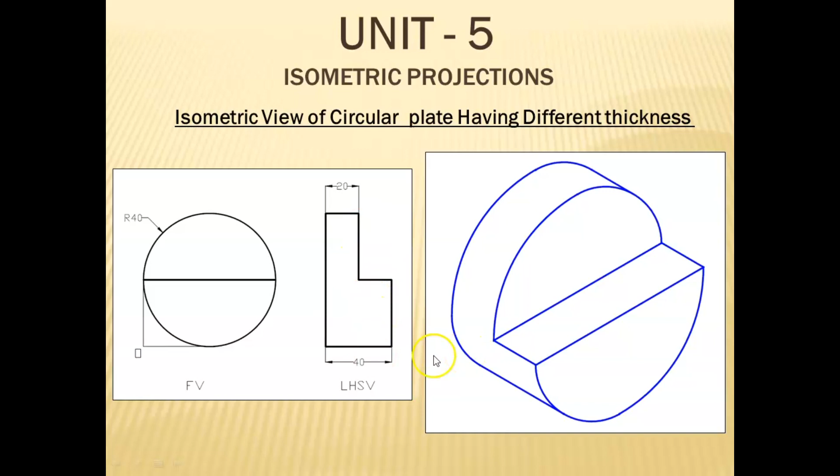Now the figure shows the front view and end view. I already explained this: end view means a side view of an object. So draw the isometric view and show overall dimensions. Now here the front view and LHSV are given to you. Normal practice is that we go with the origin in order to place the given views. But in this question, you can see no origin is given to you. Instead of that, they have mentioned which one is the front view and which one is the LHSV.

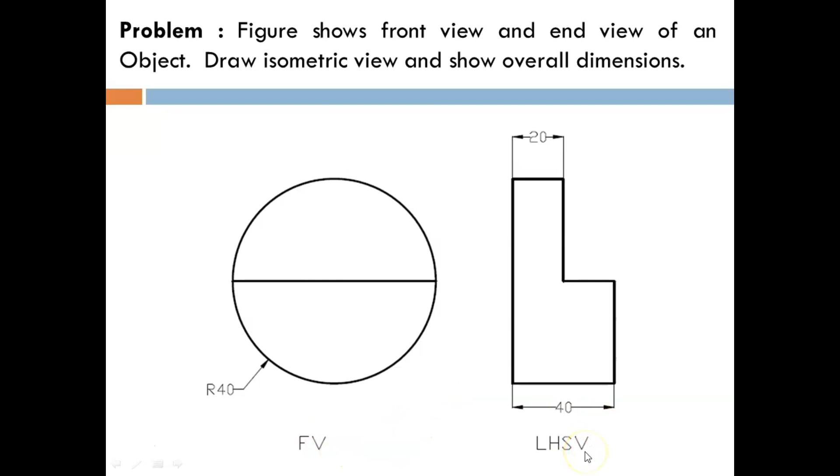So let's start with positioning the views in the isometric box. Now this is the structure of an isometric box, and this is the origin. Now considering the position of this box, in the question they have mentioned left hand side view. It means that you can see the left side of an object, or in other words, you can see the left side of the isometric box. So there are two sides you can see here.

If you consider this as a front view and the observer is exactly opposite to this plane, then this becomes the left hand side and hence it becomes LHSV. In the other condition, if this is the front view, then it becomes the right hand side, considering the position of the observer. So the given position is correct as per the given question: front view and LHSV. So here the front view is this one, the observer is exactly opposite to this, hence this plane becomes the left hand side plane of the object.

With the help of this you can conclude: if LHSV is given, then you have to draw this view on the left of the origin, and if it is RHSV, then you have to draw that side view on the right side of the isometric box. So here I have mentioned LHSV and the front view. This plane is for the left hand side view and this plane is for the front view.

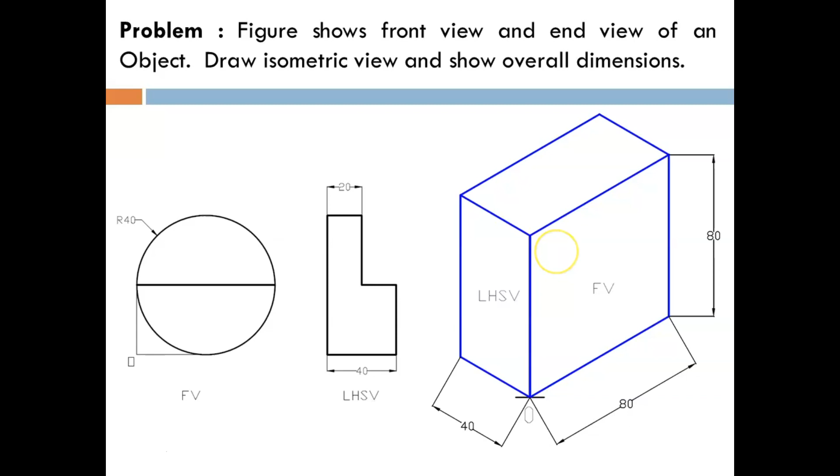Now considering the dimensions, this plane is for the LHSV, so the base is 40, as mentioned here, and this is for the front view, so the radius is given as 40, so the diameter becomes 80, so the base is 80, and of course the height becomes 80 for the front view. So this height is equal to the height of this line and this line. So the LHSV becomes 40 by 80. So three dimensions are calculated using the given two views, and with these three dimensions you can complete the required isometric box. We have already learned how to draw an isometric box in lecture number 1 of isometric projections, so kindly refer to that video.

Now in the front view you can see it is a circular object. It means here you have to draw a circular plane, and we have already learned in lecture number 2 of unit number 5, that is isometric projection, how to draw an isometric view of a circle on the required plane. Now we know that this is for the front view, so this is the plane on which you have to draw a circle.

So here first join the longest diagonal. After drawing the diagonal, this corner and this corner are not useful. Other than this there are two corners that can be used. Out of these two corners, let it be this one; from this corner draw a line in such a way that it will be connected with the midpoints of the opposite sides.

Now this is the corner, so these are two opposite sides and these are the midpoints of these sides. So from this corner you can join this midpoint. So here you will get the intersections with the longer diagonal. So now this is C1, C2, C3 and C4. So this is a 4 center method that we are applying here. That's why I have given the 4 center names.

Plot the midpoints so that it will become easy to draw an arc to complete the required circle. So here you can see the midpoints are plotted. Now using C1 and distance equal to this corner to this midpoint, draw an arc till it reaches the next midpoint. So I repeat, center as C1, from this midpoint draw an arc so that it reaches this midpoint.

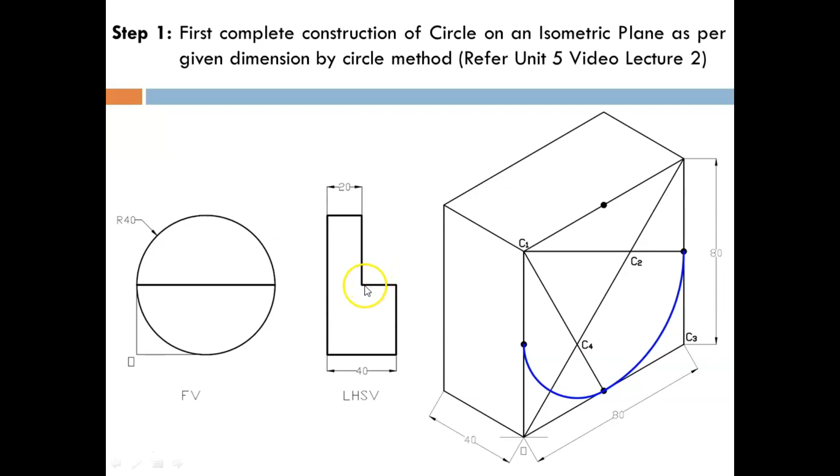Now considering this semicircle bottom side, it fits over here and that we have drawn over here. This semicircle, when you see from the left hand side, represents a line. So after that we have to move from this point 20 mm inside in a horizontal manner. But before that we have to draw a plane at 20 mm. We are considering a second plane over here at 20 mm from this. Total length is 40, so this is 20. So this is your second plane to complete the circles on it.

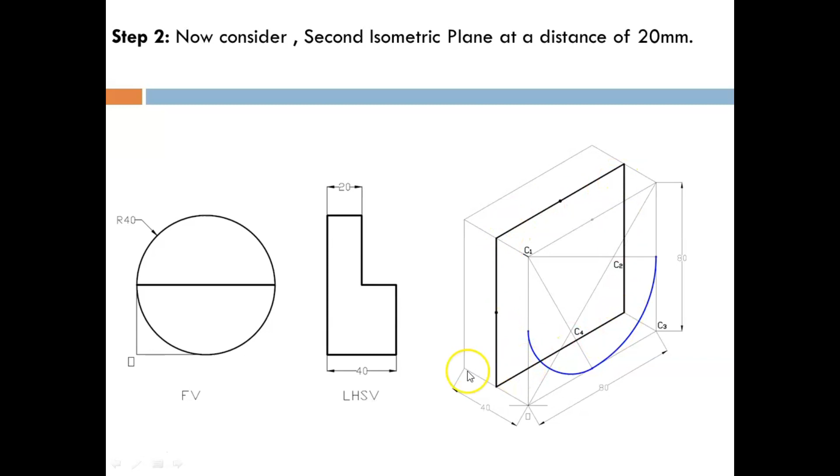Now join lines from this midpoint to the midpoint of the second plane, midpoint to the second plane midpoint. From this midpoint to the midpoint of the second plane, and from this midpoint to the midpoint of the second plane. So this line is nothing but this one we are drawing.

Now coming to the required portion of the semicircle. You can see here, after this, the semicircular portion is exactly on the top side. So you have to draw the semicircle on the upper portion, not on the bottom side, on the second plane. So considering the second plane, you have to draw only the semicircle portion, and that is on the top side. To complete this, as we have already learned in lecture number 2 how to draw an isometric circle, we need two centers, C2 and C3 only.

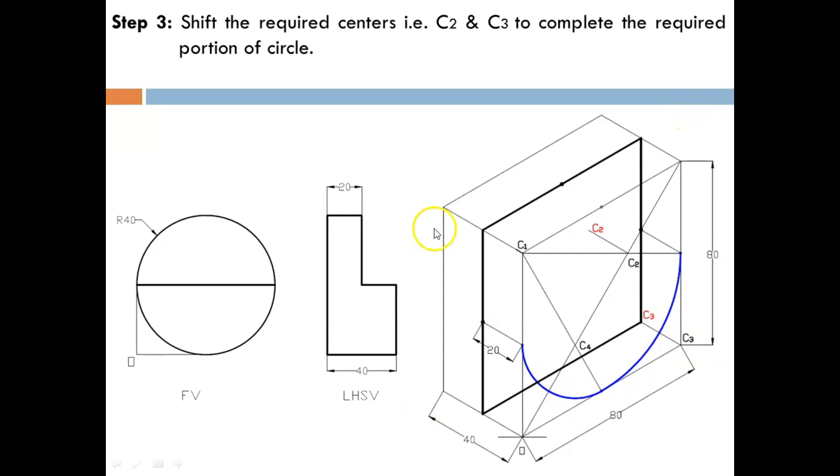So shift these centers. Now see here, we are moving 20 in this direction. Hence, we have to shift C3 in the same direction by 20 mm and C2 in the same direction by 20 mm. Now these are your new centers to draw a circle on the second plane. First, darken these lines. So now you are here up to this point.

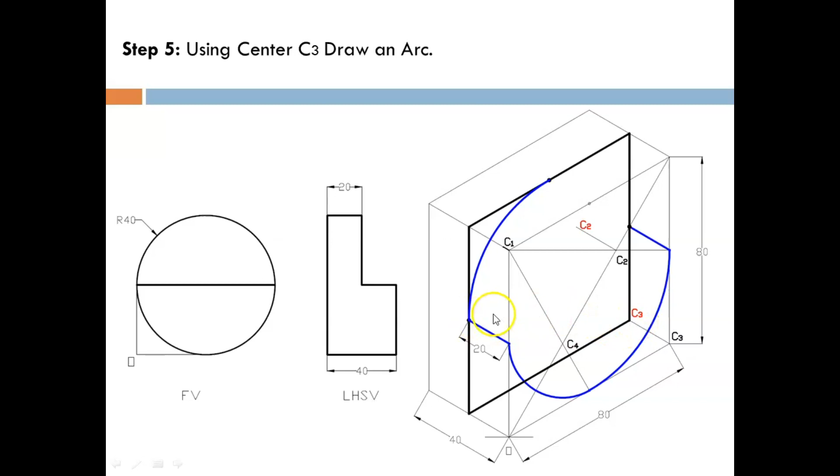Now using center C3 and distance up to this midpoint, C3 to this point, draw an arc so that it reaches this midpoint. I repeat, center as C3, this new C3 on the second plane, distance up to this midpoint. So C3 to this much distance you have to take and draw an arc so it reaches the next midpoint.

Now coming to C2, so center as C2, distance up to this midpoint, C2 to this midpoint, and draw an arc so it reaches the next midpoint.

So now you can see here the semicircular portion, this one, it's completed on the second plane. See, this is your first plane. Here is your second plane. Okay, now we are dealing with the second plane. So this one is your second plane and semicircle is plotted on the second plane.

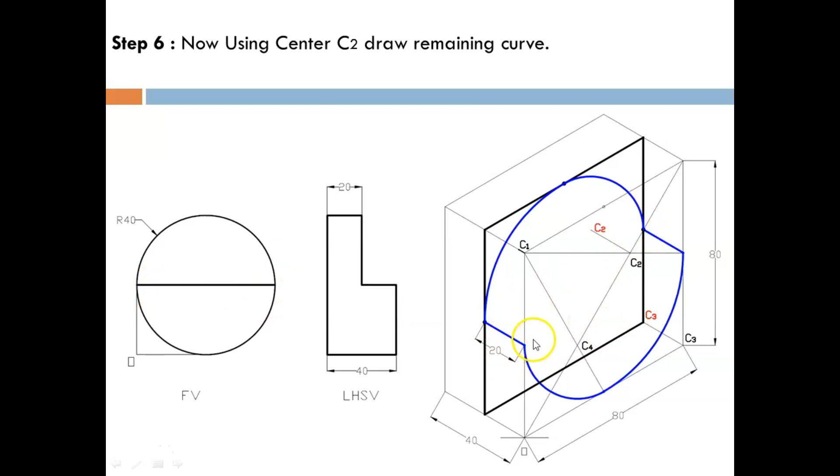Now here you can see a horizontal line passing through the center. It means what? You have to draw horizontal lines over here joining these 2 points. So you can see here these two horizontal lines are joined. Okay, so when you see from the front, you can see the semicircle over here. Then this line is getting merged with this one. So this is the line, and then the upper circle.

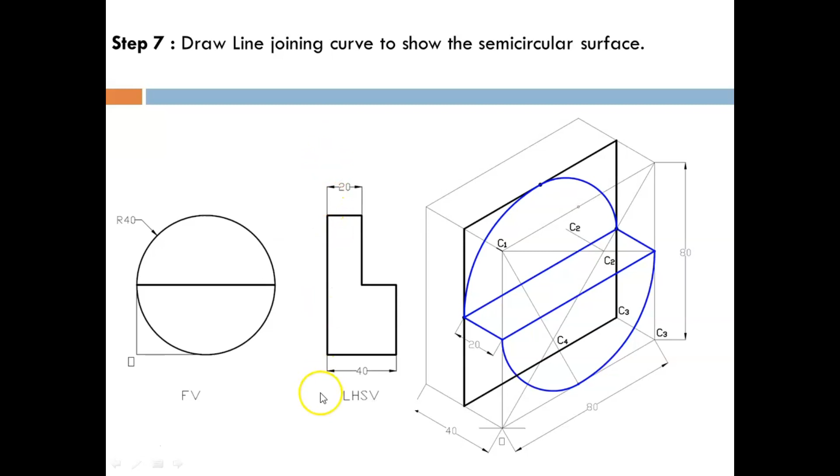Now we completed a semicircle on the first plane, then semicircle on the second plane. Now we'll go for the third plane. So this is your third plane. Now to draw a circle, okay, here you can see that if I consider the complete circle, only this much portion is visible to you, only this much. So to draw this much arc, you can refer the video number 2, how to draw an isometric circle. We need 3 centers, and these centers are C2, C3 and C4.

Now this third plane is 40 mm from the origin. So from here it is at 40 mm. From here it is at 40 mm. So from origin, this plane, you can see here, it is at 40 mm. And if you want to draw a circle on this plane, then the required centers C4, C3 and C2 must be shifted in the same direction by 40 mm. Okay, so C4 is shifted by 40 mm, C3 is shifted by 40 mm and C2 is shifted by 40 mm.

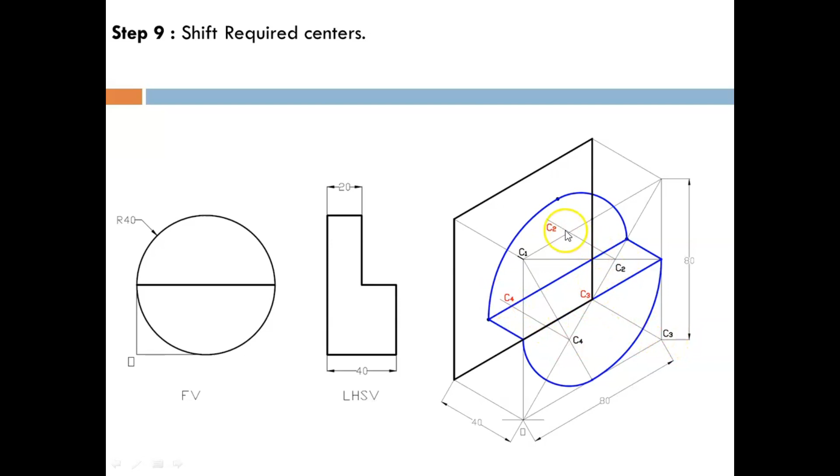Now show the midpoints of the third plane, and now first center is C3 here. C3 as a center, and distance up to this midpoint, C3 to this midpoint, draw an arc till it reaches the next midpoint. I repeat, C3 as a center, distance from C3 to this midpoint, and draw an arc till it reaches the next midpoint. Now center as C2, I repeat, center as C2, distance up to this midpoint, draw an arc.

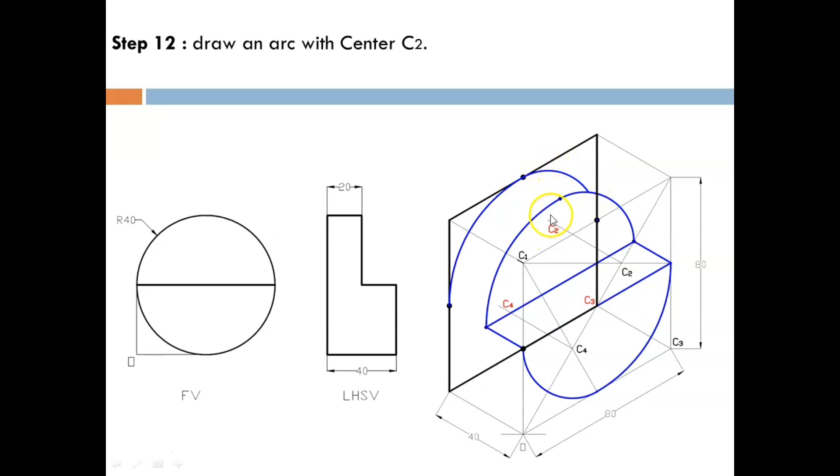Now here you cannot complete this arc, just draw an arc till it reaches the circle on the second plane, because it is not visible beyond this. So you can draw up to this only. Okay, so I repeat here, C2 as a center, distance up to this midpoint, draw an arc. Now same way, center as C4, I repeat, center as C4, C4 to midpoint distance, and draw an arc till the next midpoint, or you can say till this curve touches this one.

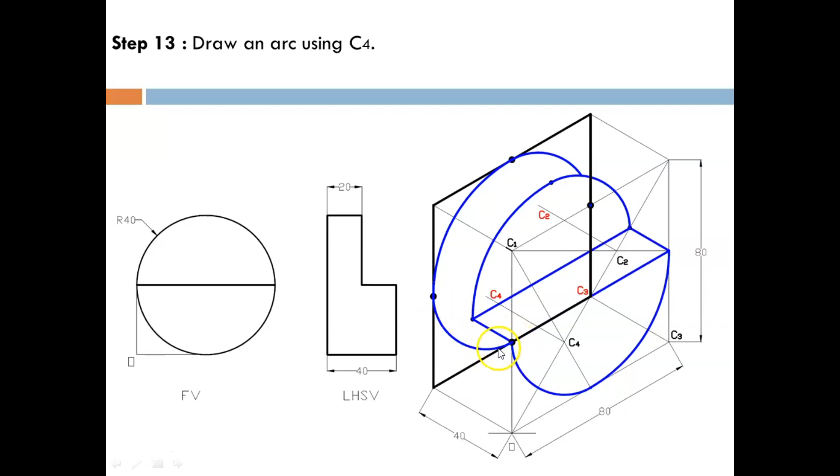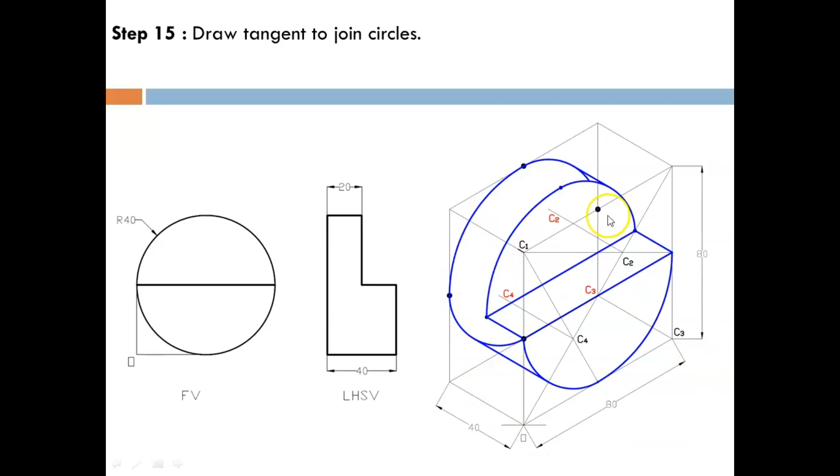Now draw tangent over here. You can see your tangent, similar tangent on the other side over here. So here is the first tangent, second one is over here. Now we need to remove this portion in order to show the actual three-dimensional object. So these are the unnecessary portions of the drawn arc that we need to remove. After removing this, you can see here, this is the structure of the required object.

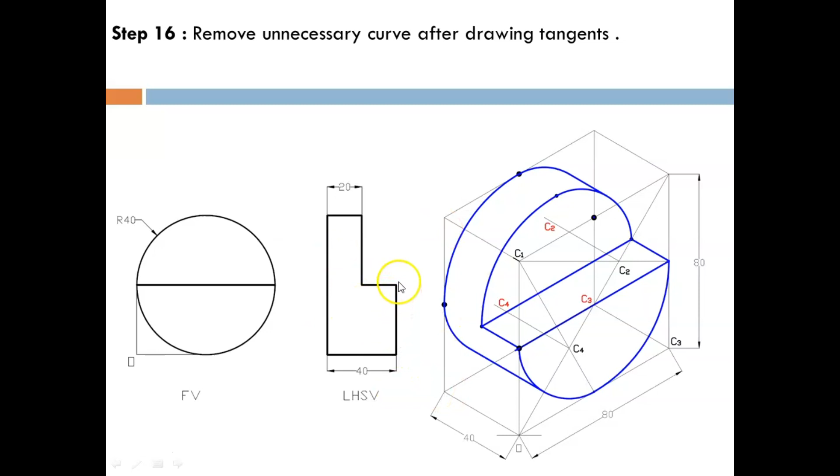Here you can see, when you see from the front, semicircle at the bottom and this line, then the upper semicircle over here. So you can see an upper semicircle. When you see from the side view, this cylindrical surface appears as a rectangle, but when you see from here, you will find a rectangle up to 40 mm and then of 80 mm. So this is 40 mm and this is 80 mm. So this is the construction for the required box, and this is your final solution.

Now this question needs a lot of constructional work. So go through each and every step and understand how the circles are drawn on different planes using shifting of the centers. I hope the idea is clear to you.